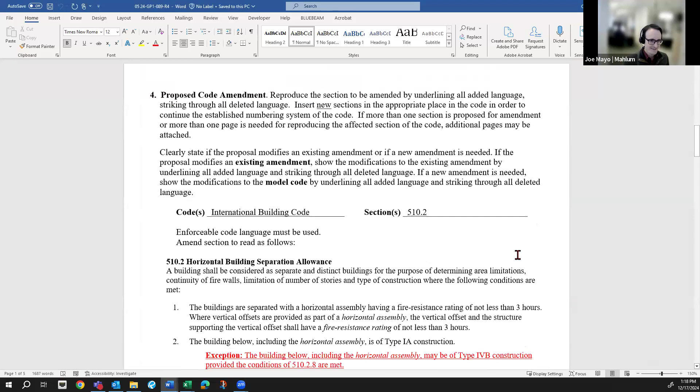Thank you. I can go through a couple changes since the last meeting, and Dustin, if you'd be so kind as to slowly scroll through the proposal. I heard the comments in the last meeting, and we've made updates so that everything new or changed is now underlined. The numbering has been corrected.

One comment from the last meeting was that adding a new section 510.10 created redundancy and potential confusion. So to address that, the proposal is now incorporated back into 510.2 as it originally was, and does not propose to create a new code section 510.10.

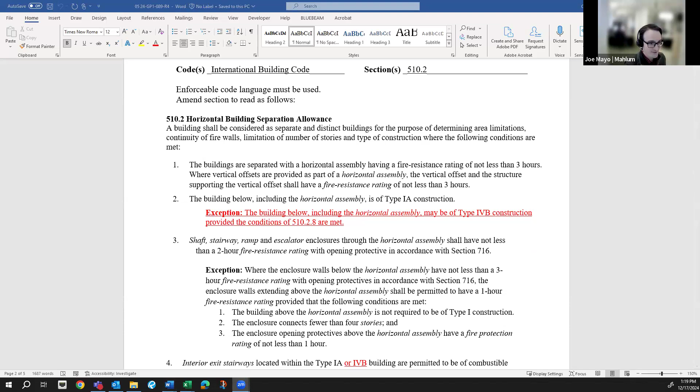In addition to general cleanup, the revised proposal acknowledges Hoyt's comment to specifically address occupied roofs, found in number 8.7. It also addresses Tim's comment about stair pressurization and now requires all stairs to be pressurized regardless of number of stories above the grade plane, in 8.8.

At the last meeting, I shared fire testing from the RISE fire test, specifically for type 4B construction, where the test had fully exposed columns, beams, and ceilings. The tests demonstrated 4B construction's resilience during fire, with rapid extinguishing after flashover without sprinklers or any active intervention. After 2 hours, the fire was essentially extinguished, and tests were carried out for 4 hours without structural compromise.

So the proposal is again looking at 4B construction, and some might ask why type 4A wasn't included. A couple quick words on that: the proposal does require 3-hour fire resistance of all primary structure and load-bearing walls for type 4B construction. Load-bearing walls are not permitted to be exposed in this proposal, so it would essentially be the equivalent of type 4A for any wall construction.

The main reason is type 4A requires 3 layers of gypsum board encapsulation, and doing all that field work of 3 layers makes the systems not cost competitive and creates a lot of additional site work, which is exactly what needs to be eliminated if we're going to deliver housing faster and more efficiently. The additional 3 layers of gypsum board over every timber surface also greatly increases embodied carbon impacts.

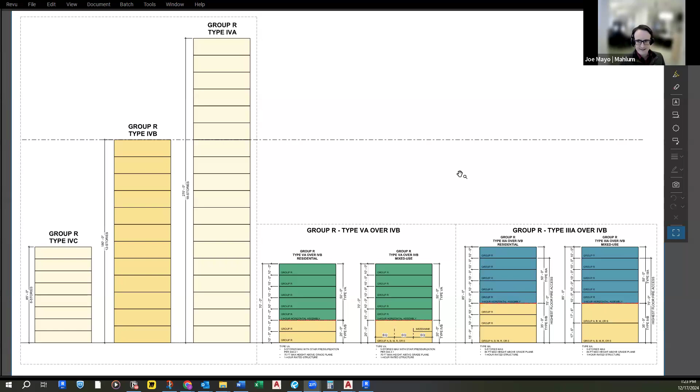And Todd, I don't know if you have anything you wanted to add. Yeah, so thank you, Joe.

In this proposal, if you remember on Thursday, the IBC decided to table this, under the context that we probably were going to finish on Thursday. So there's a little uncertainty on whether or not we could hear this within the package. Bringing it forward today is really the last opportunity to talk about it, and also to get input as requested in one of the meetings from the IFC TAG. So it's up to the TAG what to discuss today and potentially move forward.

But I would say the interest here, when the Tallwood Ad Hoc Committee met in 2015, I believe, the goal, it's called Tallwood, was to go to mid-rise and higher with mass timber. And what often isn't contemplated, in my industry, is more of these higher performance, low-rise typologies.

In this podium proposal, it's not so much to try to be equivalent to 1A. Obviously, it's not non-combustible. The objective is really to find and understand that, in my understanding of the history of going up to the ICC level, only type 4A was proposed as kind of an equivalent to 1A.

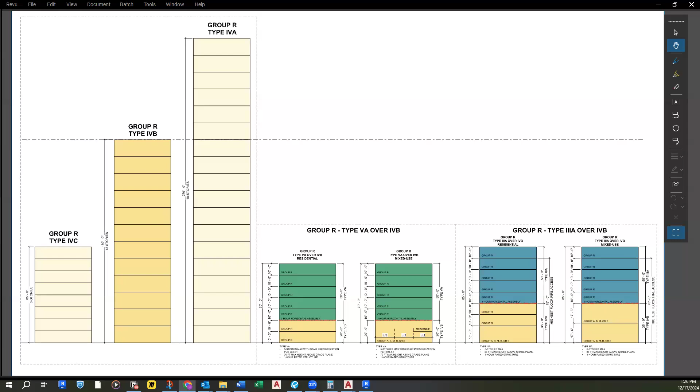Besides some of the reviews, just what the statements have been said so far. So I'm not sure I really support this change yet at this time, because of life safety issues—I believe there's still a life safety issue on this. So that's it.

Okay, thank you, Hoyt. Let's go to Ken. Welcome.

Hi. Not too sure if this was supposed to be a code change proposal to the WAC or to the International Building Code 2024 edition, because 510.2 number 1 and number 2 had changes to it, and you're not showing those changes in the 24 language. So I don't know if you're crossing those out, but I think your code change proposal needs to get fixed to either include the language and keep it, or show that you're deleting it.

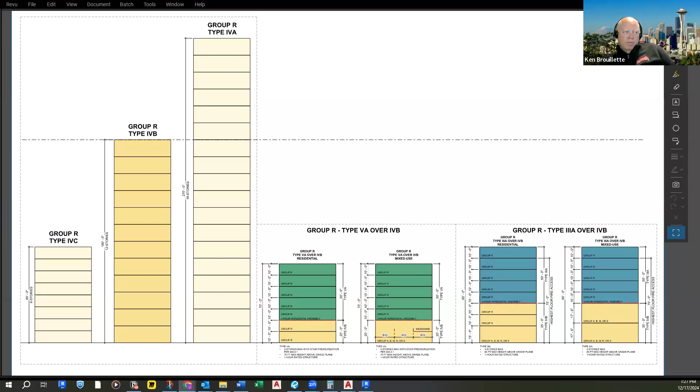And then under number 8—hey Ken, just real quick, Dustin, can you grab the screen back and maybe show us that please? Yeah. Okay, sorry Ken, go ahead.

Well, in addition, I think that the picture that was just up is kind of deceiving, because it says group R occupancy, and the proposal under 8.4 only talks about an R2 occupancy being allowed, or shall be R2 occupancy. So the screen was kind of—I'm thinking, oh, I guess I can have an R1 based on that picture. So I'm just trying to figure out what was the reasoning to only allow an R2 and not an R1 or another R type occupancy, because in the beginning, in number 5, it says the building or buildings above the horizontal structure shall be permitted to have a group A, B, M, R, and S occupancy. How come it's R2 specific for this type of construction?

Thanks. Okay, and that rolls right into John and Micah—maybe you want to address that, go ahead, or whatever. So John. No, I didn't want to try to address it.

Well, I'll put it out there because it was part of the discussion with some of the Seattle contingent, but I won't blame or put that on you, John. So no, it was more of a discussion we had about saying, well, limit it to the type that you're really after—what's the goal here? The goal is housing, so let's limit it to the housing issue and not worry about the other types of Rs. I think that's as I recall the discussion.

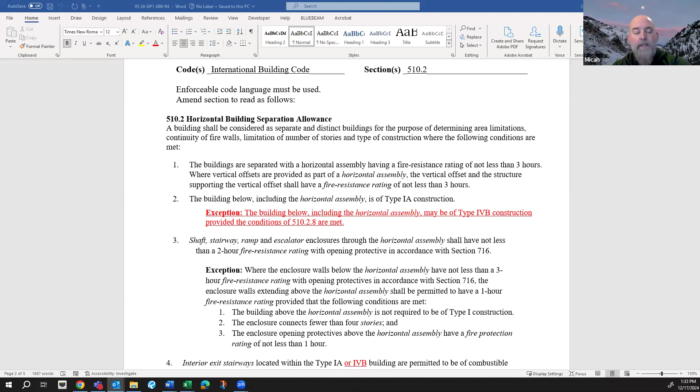One of the big items here is that for the 1A current provisions, they provide for both rating and non-combustible construction, for the benefit of resetting story count, height, and type of construction. The RISE test that you cite in here doesn't account for the equivalent non-combustible construction - it does for the rating. So I'm not sure where you're still getting the justification that we should be allowing the exposed mass timber ceilings with this.

Another part - looking at the proposal itself, the exception to item 2 should probably add that the additional requirements of 510.2.8 are met, not just that the conditions of 510.2.8 are met. There are other conditions in 510.2 already that probably should apply to this no matter what.

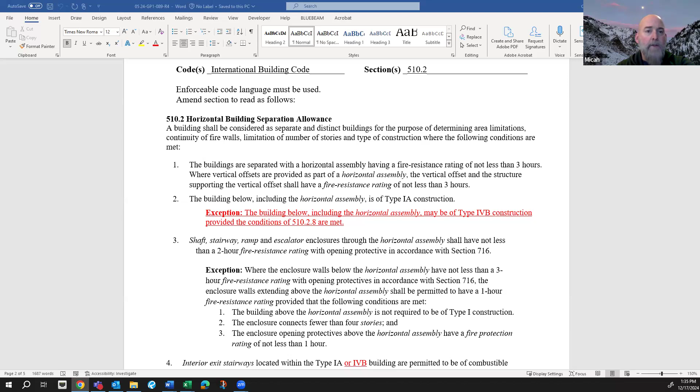Thank you, Micah. And Dustin, maybe you can scroll down a little bit. I think the idea of adding 'additional' in there would be good. Go back up to that first one. If you want, we could actually type it in there.

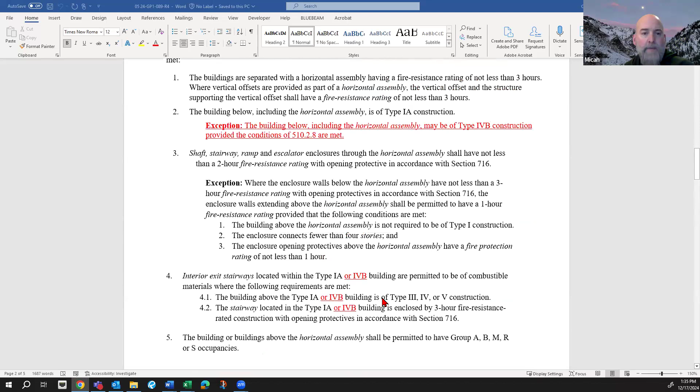Yeah, that was in exception 2, or the exception to 2. Dustin, do the constructions provide the additional conditions? Do you mind adding that?

Did you freeze up, Dustin? I muted myself and did not unmute myself.

Give me a little bit of direction on where that one's going to go in here. Second line of the exception, I think Mike is proposing add the word 'additional' before conditions - additional conditions. Right there.

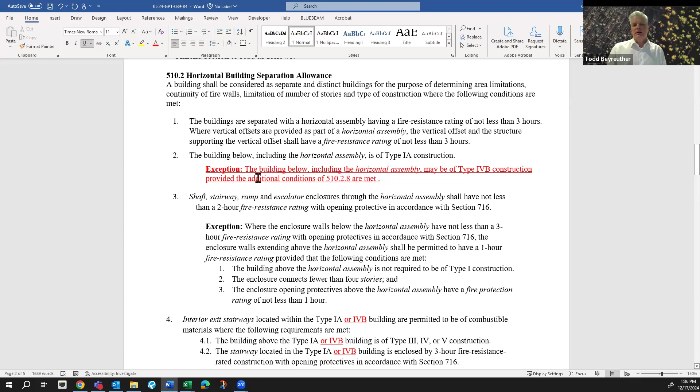And then as we scroll down, I think Hoyt and Micah, I'll respond a little bit to the national level versus the state level. Part of this is not denying that it's always better to have more input, but also Washington and Oregon, I think most of us know, are leading in a lot of these areas.

Not just in the jurisdictional and political realm, but in the technical realm. Our strengths at Washington State University, Oregon State University, our coalition, our technical public-private coalitions that have been around since 2014 - I would argue we are very capable of proposing this type of amendment, and even at the national level, we as states are likely leading in this discussion. So it's not avoidance of that process. As you know, the couple of previous attempts were very simple, straightforward, type 4A.

I'm thinking of Dennis Richardson the last time around. He wasn't representing AWC at the time in that petition, but this kind of discussion has gone forward, and it's always been about that equivalency rather than what are we really trying to achieve here. We're not trying to achieve unlimited area. We're not trying to achieve, obviously, the high-rise building. So is there new learning from not only the fire testing, but also just our technical advancements in the last 5 years since this was last raised?

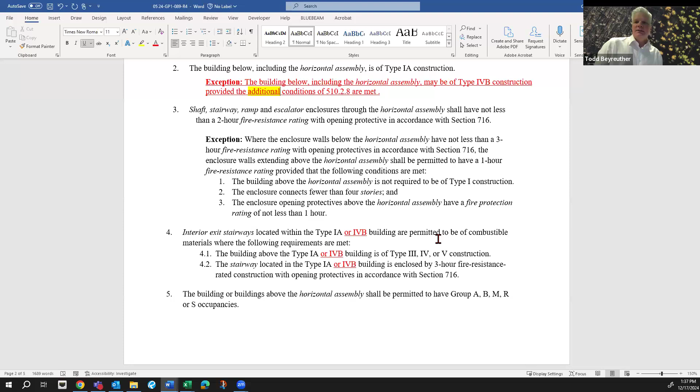So can you scroll down more, Dustin, and then we'll leave it to the group here whether there's more discussion or you want to take any type of action on this. Go ahead, Roger.

Well, I want to just offer my opinions, and Mike, I'm not sure why you and I are offering very alternate opinions so far today, but I will remind people that the state of Washington adopted the type 4 A, B, and C ahead of the international, the ICC. I agree with Todd - we are the leaders in the industry on mass timber. So as far as adopting it before the national, I don't have any concerns whatsoever.

The other thing that I wanted to point out, as far as the commercial demand for this type of product, is you saw on the diagrams that were shown, there are 7 and 8 stories, and I recognize that this is for the Puget Sound area for the most part, maybe Spokane, but densification is a huge issue.

And how we get from a 6-story, 7-story up to an 8-story is always a challenge. So I believe that providing as many possible solutions to an 8-story building as possible to design teams and developers is very important. And certainly when we start talking about cost of housing and how we continue to densify and build more housing at a reasonable cost, throw in the low income or middle income or whatever you want in that grouping, I think that this proposal could be very helpful and provide opportunities.

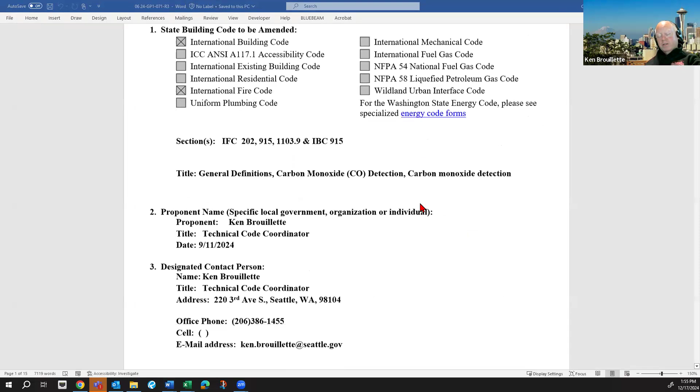All right, 071 coming up. So Todd, while he's bringing that up, let me just give you a recap on what I know on the next proposal. On the 12th, the IBC tag at the 2 hour, 6 minute, 50 second mark approved the petition. The next day on the 13th, the BFRW approved the petition revision 2 to go to full council.

And back on the 12th, you'd made a comment, and I agreed to it, that I would work on any of the changes for the public comment period meeting and try to clean anything up that was addressed by the building code tag. I had no idea this was going to be happening today.

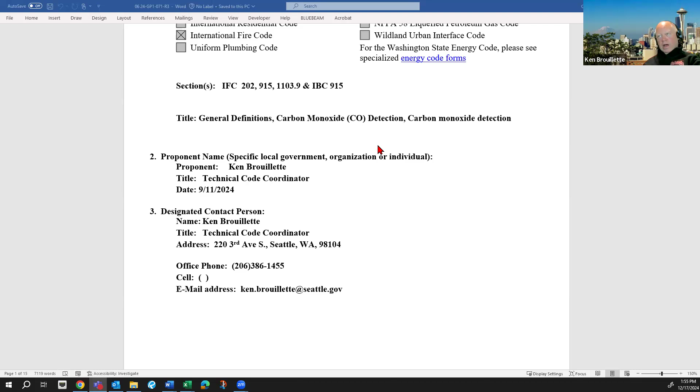I saw the fire code tag meeting canceled yesterday. I saw the email that said there's a joint meeting today, and then I pull up the agenda and it says it's the IBC tag meeting. So I was thoroughly confused on what's going on. I didn't know that we were going to try to make changes now. I was under the impression that everybody agreed that I was going to try to tweak it at the public comments, but it's already gone through by the tag once, and now it's back at the tag again.

So I'm just lost. Ken, I think your comments are accurate, but can you help us better understand the IFC proposal went through, and what does that mean? If I understood your comments at the IBC, that this proposal was different and not correlated, but help us understand that, please.

Well, my understanding is the IBC at 2:06 and 50 seconds said you were okay with that proposal that was changed, that got rid of the word existing. The revision 2 that got sent or approved by the BFRW did not have that change. So again, I think, wasn't that the IFC proposal? I thought we tabled the IBC. No, proposal, it was voted 2:06 and 50 seconds.

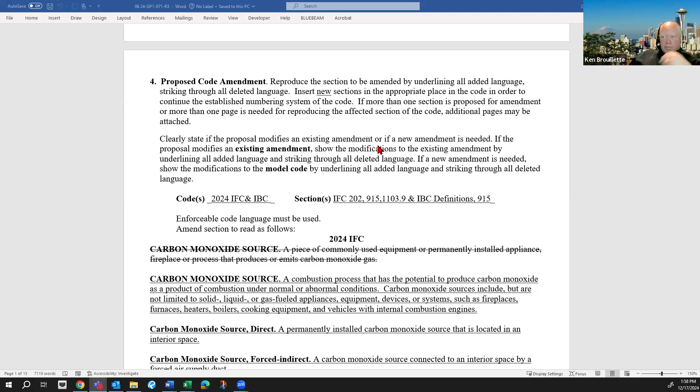So now you're confusing me, Ken, but I think you're raising a point here. So let's unpack this. Hoyt, go first, please. I think Mike was up first, so I might as well just go in order. Okay, that's fine.

Michael, go ahead. I don't know. I think Hoyt was, but I was just going to comment that my scribbled notes are consistent with what Ken is saying here. I'm showing that last week we approved as modified to move it to the full hearing. So I don't have... so we could go on a correlation at the council level.

Yeah, that might be true, Mike. And if so, I apologize. I, for some reason, remember we tabled it thinking we were going to finish on Thursday, and therefore that this was going to move forward to, as we're going to table it to bring into correlation. But go ahead, Dustin.

You probably can tell us. I think that's true. We did table it, but then we jumped back into it, and then ultimately had more conversation, and then the approve as modified. If my notes are correct.

So go ahead, Dustin. On this particular one, looking back at my notes for the last IBC only tag meeting, I have it as a recommend adopt as amended at that meeting for revision number 3. When we heard it at the BFRW committee, we brought that one forward. It was discussed to have it worked on among the public comment period. I think this speaks to some of the concern that Micah brings up about correlation happening sooner than later.

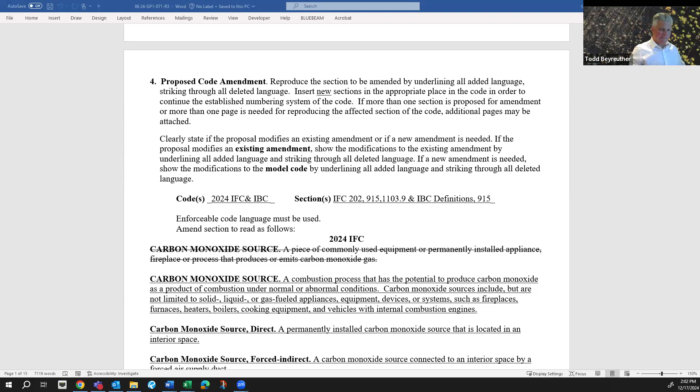Okay, thank you, Dustin. Tim. Tim, you're muted if you're talking. Sorry, I'm sure you called on me. I had legal step into my office.

So I was just going to comment that maybe the most productive thing, if we're going to discuss this, is to pull up the changes to the IFC's proposal just to see if they agree to it. But I'm totally comfortable, but the one that's on the screen doesn't even show anything new, so IFC wouldn't know what those changes were.

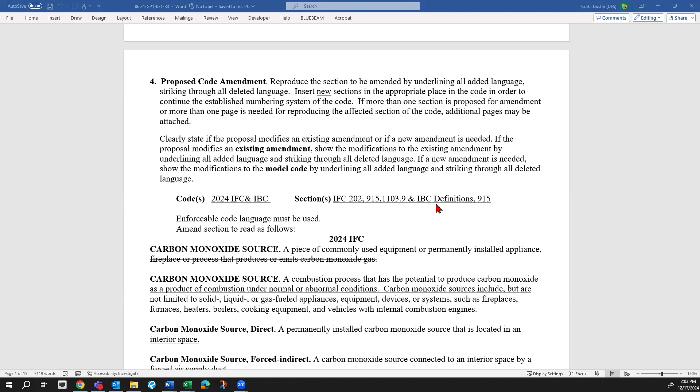Go ahead, Roger. I agree with Tim. I think we're here, and I seem to remember after Dustin reminded me that was what we were talking about is, all right, IBC approved it. I thought we made a couple of minor changes, but because we were getting the IFC tag, let's at least let them know what those changes were. I'm also fine if we just at this point, that if the IBC passes something that's a little bit different than IFC, then that is the correlation that has to happen either probably during the public comment period.

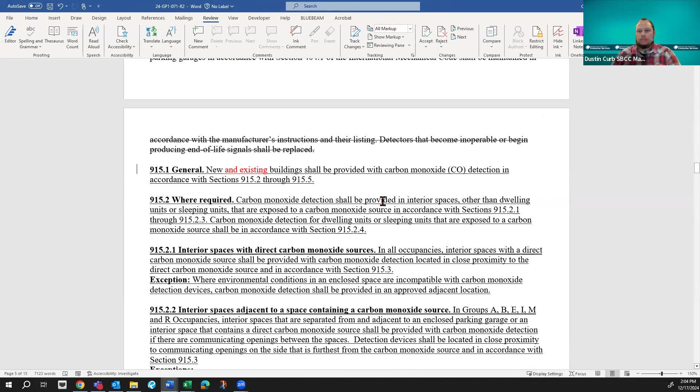So this here, I believe, is the change, the 'or existing.' Anything else that's changed should be highlighted in red in this document. Yeah, I just want to tell you, Dustin, now I remember, once you showed that it refreshed my memory. That's what we wanted to make sure was put in for existing buildings also, carbon monoxide detection system.

Okay, Micah? That wasn't the only change that I had concerns with, and I think that's where it ended up needing work. That was related to the power source.

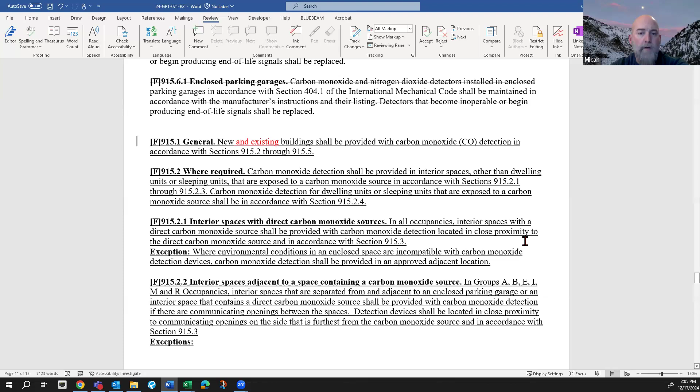It's striking the IBC language, or the IFC language in chapter 11, that allows for battery operated detectors, and moving the power source information into 915.4.1.1, where it no longer allows for battery connected carbon monoxide detectors in existing structures. They're required to be wired. That's where there's this discrepancy, I think, that Ken talked about coming back in public comment, furthering this issue.

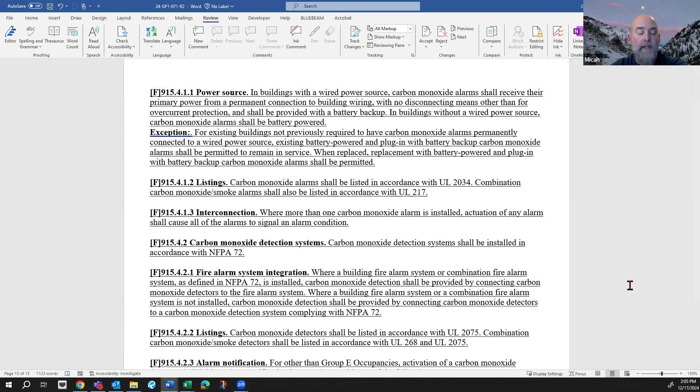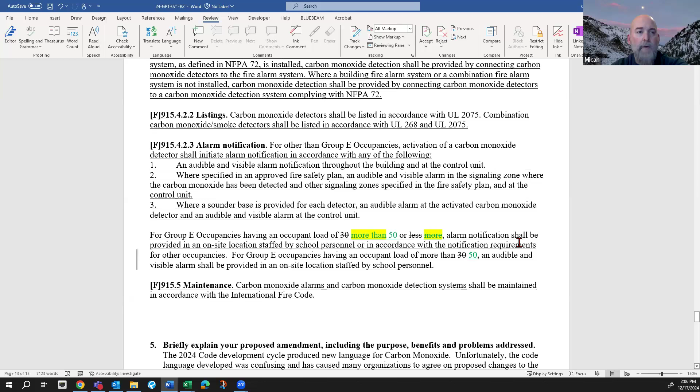If we want to address it today, then we need to look at the 915.4.1 language and the strike-through of chapter 11 language further down in the proposal from the IFC that removes any allowance for battery operated carbon monoxide detectors in existing buildings where they were not previously installed. The new requirement is a retroactive code change that allows or requires hard wiring of carbon monoxide detectors. Thanks.

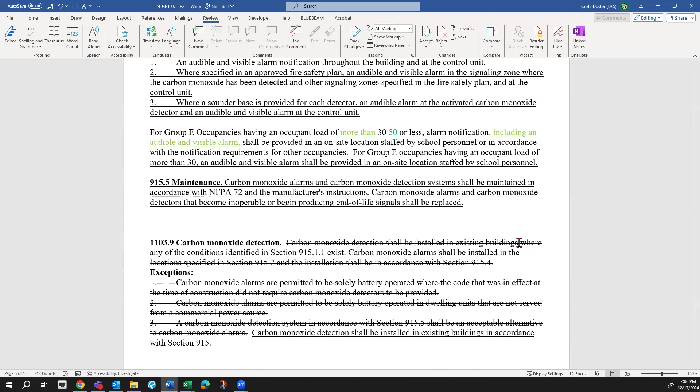Okay, Tim? The only other change that I recall us making was to the definition of carbon monoxide. There was something like normal and abnormal conditions. We just said any production of carbon monoxide, something to that effect.

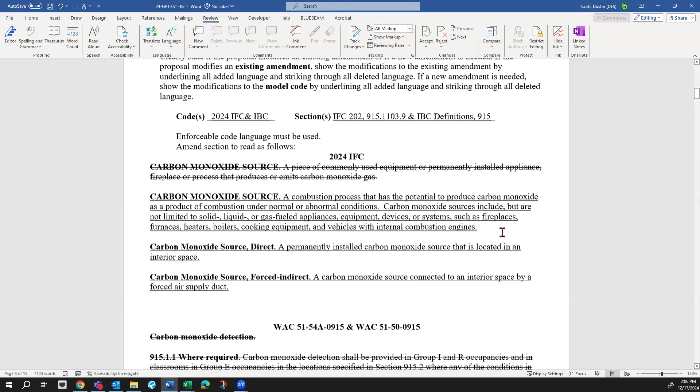In the document I have here today, it's got revision 3 being compared to it. I did not make the change. I know we talked about it, but I don't think we modified that in this proposal. But I guess that's why we're here as the two groups, to correlate these changes.

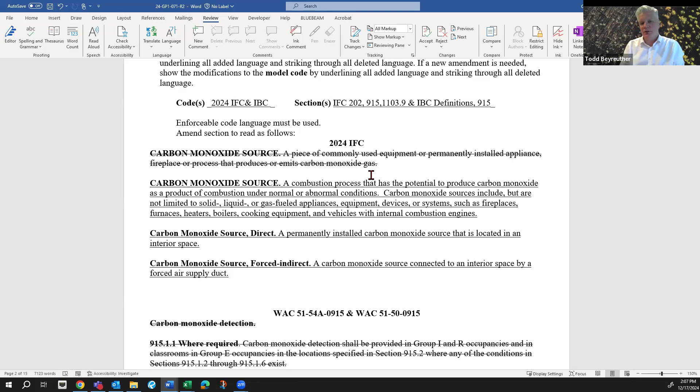Okay. So Ken, as a proponent here, what do you suggest? Do you want to talk more about this in this joint meeting? Well, I think your previous request was to take time and do it. It's just tough to see your proposal not showing the changes that were done at the tag level, because now it just looks like everything that's there just came from me. So it's like it doesn't show that 'or existing' gets removed. I don't know, and this is the reason I thought I had more time to work on it.

I wanted to look at 1103.9 and see if it should just go back and not get struck, and just make sure the references are okay to take care of the existing, that would take care of what Micah's concerns were with the battery. I just didn't do the deep dive yet because I really thought I was going to be doing this at public comment. And Dustin, I love you to death, but the agenda only says IBC at the top of it.

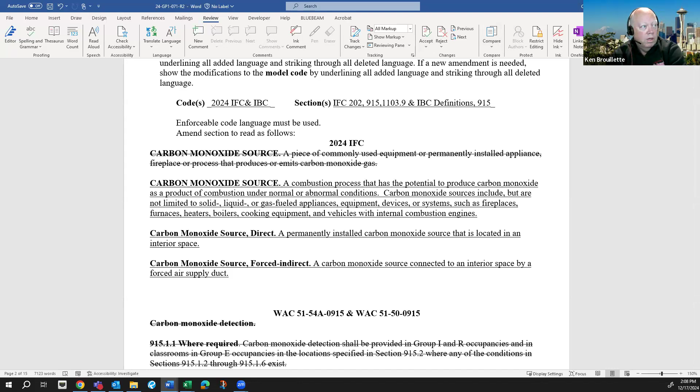If you wanted to scroll up and look at the agenda, it doesn't show both. When I click on agenda, it doesn't show both. It only says International Building Code Technical Advisory Group and all interested parties. So that's why I was so confused.

Thinking that this was going to be an issue, I just thought that it was accidentally put on the agenda, since this committee already approved revision 3 that removed the existing. And when it didn't go on the fire code, and there was no fire code tag yesterday, I thought, okay, well, they're not going to talk about revision 3. So I'm just not prepared.

I would rather just try to take care of it at public comment, and see if I can explain anything, and then let the council turn it down if they want to turn it down then. But yeah, I just wasn't ready. I think there's some things that I can do to it, but if the two committees want to work through it and make suggestions, that's great. And then I'll make my public comment suggestions at public comment.

What do we need for that to happen? Would that be appropriate for me to make a motion, Dustin, that we just move this forward to CR 102? Yes. Or have we already? You already did. So I don't think there's any issue. But putting in a public comment, since we've already approved it, I think putting in your public comment to make the changes to make it better will probably get approved too, in my experience.

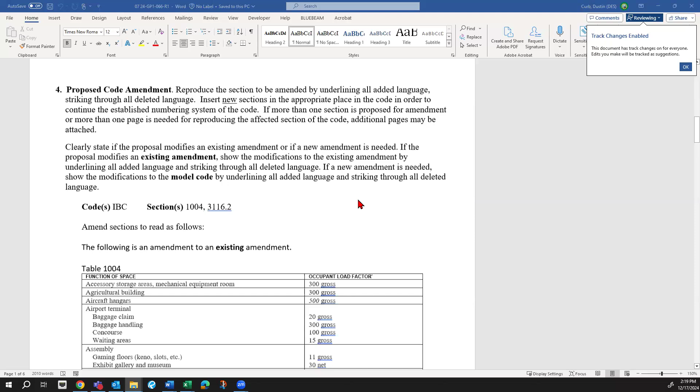Go ahead, Mark, are you trying to speak? Yes, I'm here. I think it's fair, Ken's point, that we need to address it in the fire code as well. I wasn't so clear on the process. Given that these are building code issues, I think that we forgot that they're repeated in the fire code, so we didn't make a proposal on the fire code. I did make a change based on the feedback from Thursday. However, you want to scroll down to the separation section, there was some question about it, it's down further, right there. Yeah, so the 5242 and 5245. Previously, actually, this is not Rev 2, this is Rev 1. So let me bring up the other one that we have. Yeah, thank you, appreciate that.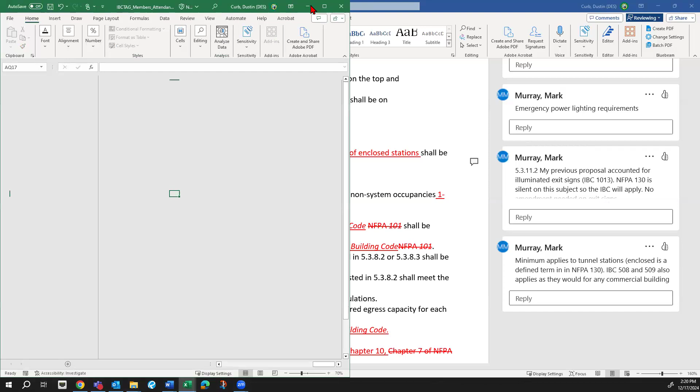So this would exceed the building code requirement if someone were to go down a pathway and find a solution using non-separated occupancies. For example, they would still need to provide at least a 1 hour separation between the back of house areas and the public areas in an enclosed station. And so this addresses exactly what I was trying to do before.

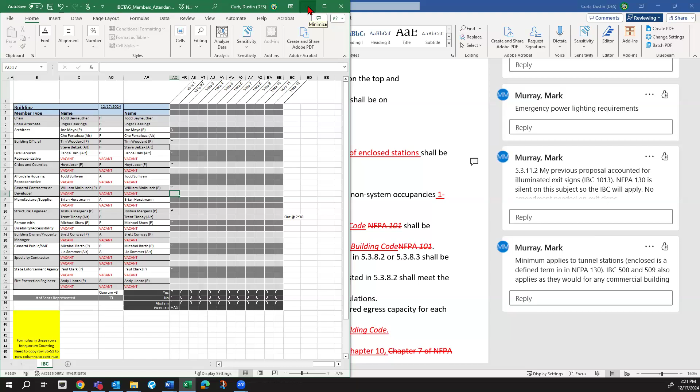This is Sound Transit's practice to do it this way, and my point is to try to just get this in the code so it's really easy for plans examiners to see and understand. Enclosed stations, as I mentioned before, is a defined term used in the code, and it captures tunnel stations and other stations that are largely enclosed such that smoke and hot gas would not easily move out of the station through natural ventilation.

So those are the changes. I didn't change anything else. I believe this may have been the only issue remaining. The only other thing in here from the original proposal was at the bottom, to actually reflect that we want to change Chapter 35 to note that we're adopting the 2023 code.

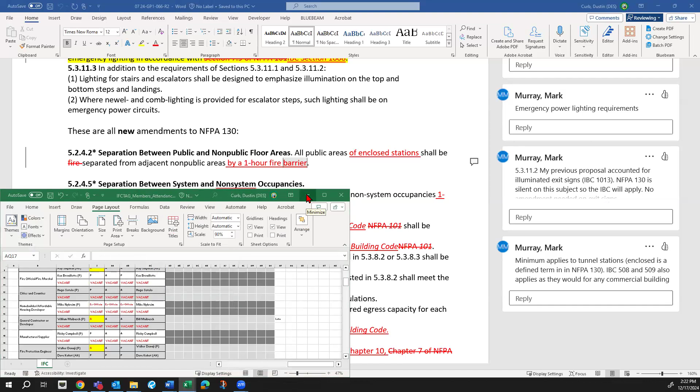Yeah, there was. Yeah, if you can just scroll down a little bit more, you'll see that the only other section that I changed from the previous is right there. So I just added that to make note that we are adopting the 2023 version as part of the building code, and put the standard language in there about where provisions exist in the building code. So that's just housekeeping. That's it.

Okay, go ahead Roger. Thank you, Mark. Yeah, it seems to me like it's obvious that this does need work, and certainly if we're finding out at this stage of the game that we should have looked in the fire code previously.

I believe there is one issue that we are going to send on to the council, knowing that that's an outstanding issue. Dustin, correct me, I don't remember what it was exactly. But we've identified one proposal that we know will be lagging behind, and we need to continue to look at. Do you remember which one that was? I believe that was going to be the 089 one that we denied earlier today.

Okay, well, I think we just flagged this knowing we approve the whole rest of the package. And in my mind, if we have to have the council take special action to say we understand this particular proposal didn't go through the proper review, so it needs to be done, and we break that out, we do that, and we address it both at the IBC and fire tags after the rest of the phase group 1 proposals are approved by council.

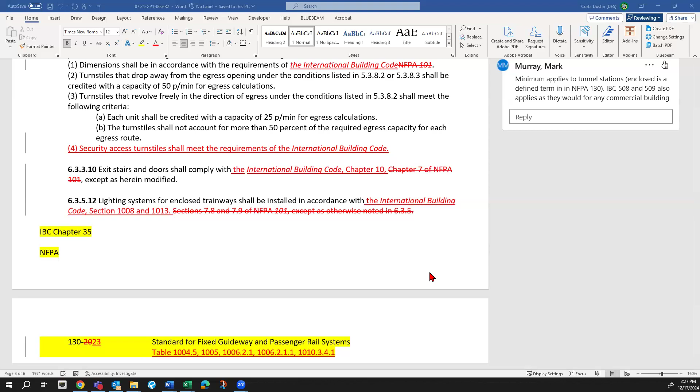I guess I just wanted to step in based on the new revisions. I have no idea where we're at with everything, but I do appreciate the changes that were made, and I think that was kind of what we were trying to communicate before, why we were specifying those separations when that was already a requirement. So I think the changes made in this latest revision satisfy my concerns about why we were making those changes to begin with.

And since those are the only issues I had left outstanding, I think what we have here is the proposal, although it needs to be correlated, although it needs to go into 35 of the IBC - I don't know how any of that stuff happens. I just wanted to speak to the actual changes and say that I can be in support of what this latest modification shows.

Okay, thank you, Tim. And I agree with Tim. Okay, thank you. Wait, go ahead, Walker.

So yeah, Dustin, I did run with it for the fire tag. So would this be a correlation process? Just seeing them for the first time today, I think Mark's proposed changes make sense, but would that be Mark and I correlating to pick up corresponding changes in the fire code?

That could be the preliminary part of that, yes. The last note on our existing amendments report is that we need to correlate with IBC Section 3116. So if that could happen there, that would be nice. Then, as we get to the correlation part of this, most of the changes to update NFPA 130 were considered editorial.

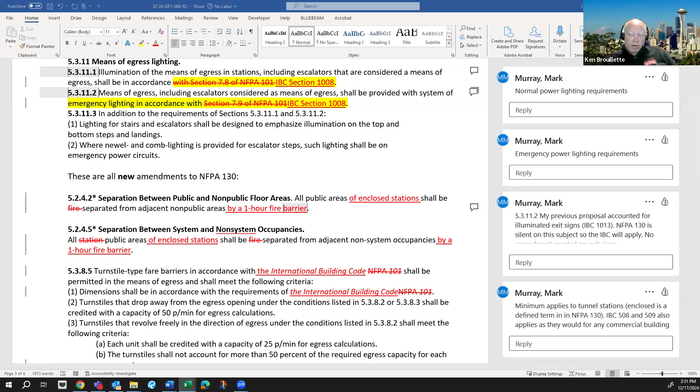It doesn't show up on this, but that is an existing state amendment where the language has been changed in NFPA 130. So I'm just wondering, for the IBC tag, what did they say about their existing amendments to NFPA 130? I'm popping it open right now, so give me one second.

This isn't one of the ones that I downloaded to my desktop today, so it takes a little bit of a second to pop it open. Should be opening up in a second.

All right, so for 51-50-3116 modifications to NFPA 130, we have keep the existing amendment as modified. Oop, and I moved beyond it. I have my cursor somewhere else. Give me one second to get back to the spot.

Dustin, I don't think we're seeing it. You're trying? Oh, I wasn't sharing it. Here, I'll pull it up for everybody to see what I'm looking at.

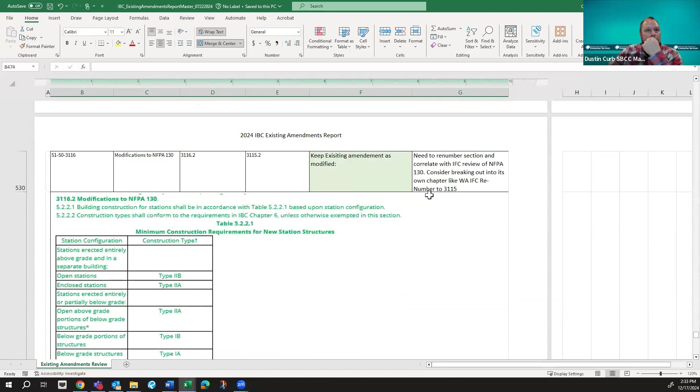I passed it. This is it right here, this big long section. So we need to renumber the section and correlate with the IFC review of NFPA 130. Considered breaking it out into its own chapter like the Washington IFC, and it needs to be renumbered to 3115 as the overall motion here. So it looks like the modifications here were just to talk about the changes made for the update to NFPA 130.

So I guess my example is scroll down to 5.2.4.3. And that word at the end of the sentence there between the ASTM and the ANSI UL standard, that 'and' is now an 'or.' If you consider that editorial, that seems like a significant change. But the 2023 version of NFPA 130 — this is just one example — says the word 'or' now. And there are other changes.

So I really think it looks like the IBC tag thought about renumbering it, making it different, correlating to make sure that all NFPA 130 standards in WAC 51-50 and 51-54 are similar. But if that's not what the tags wanted to do, that's fine. I'm just trying to listen to see what each tag wanted to do. But it kind of sounds like what Dustin just said, that they said make it its own chapter. I think it's just one of those chapters where everything just got missed. Everybody was working so hard to get so many things done that we didn't give this NFPA 130 document a good enough look. We really need to do that, just make sure we don't miss anything.

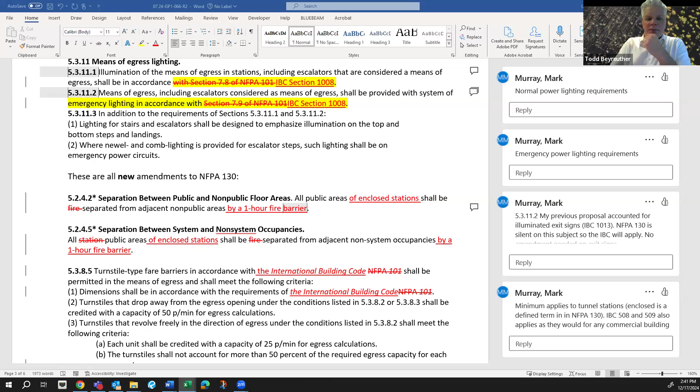Okay, thank you very much for all that. Is there any other business that I'm not remembering between the IEBC and the IFC before we move on to IBC specific tasks?

Okay, if not, thank you for the IFC. You're welcome to stick around, obviously, but we're moving into EV charging stations that are specific to the IBC.

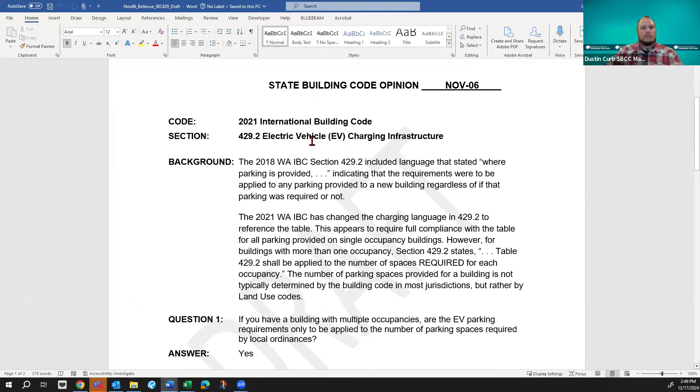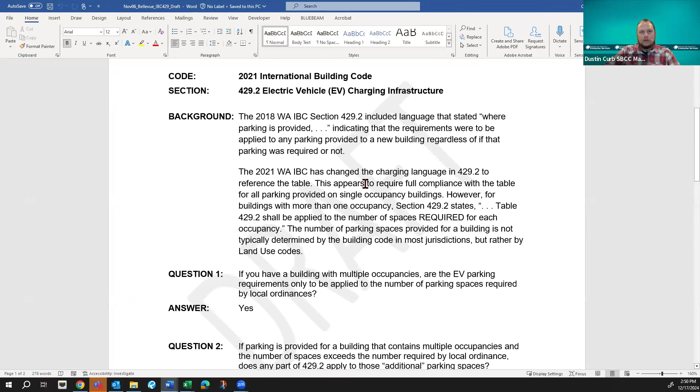Okay, thank you. So here is November 06. These are the same ones that were, I believe, posted for the BFRW here. In the 2018 429.2 of the International Building Code, the language was 'where parking is provided.' In 2021, that language just references the table. Their question is if you have a building with multiple occupancies, are the EV parking requirements only to be applied to the number of parking spaces required by local ordinances? And my draft answer was yes.

And I'm trying to get in here to some other stuff I have on from the BFRW. I think we did make some modifications at that meeting, and I want to kind of bring them up for discussion purposes, and we can move forward because the answers were changing as we drafted these. If we want to talk about question one while I pull this up, I guess it's appropriate.

Okay. As everyone skimmed this, do you kind of get the context here? So the discussion is about what is - obviously the building code does not require parking, a number of parking spaces. So does local ordinance control, and then when it goes to mixed occupancy, I'll let you read it here.

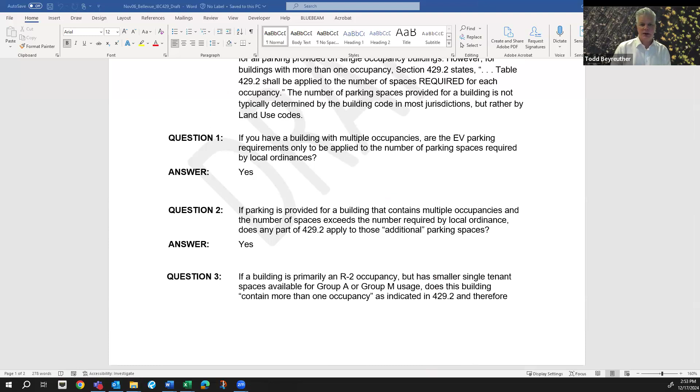Okay, that's helpful Tim, thank you. And did you get question three? Did you see that? It's a little hard as it jumps to the next page here, but I think there we go. Yeah.

Dustin, do you have - I thought we edited those at the BFRW meeting. We did, and at this moment I'm struggling to find them. There may have been an issue with the battery on my computer, and they may be in a recovery folder somewhere, I'll have to dig them up. I know our biggest struggle was, is it based on what's provided or what's required? At our committee meeting it was not clear, particularly because on the required side Todd brought up that City of Spokane's requirement is 0. So we kind of felt like we were heading toward it should be provided, but felt it needed to go back to this group for clarity.

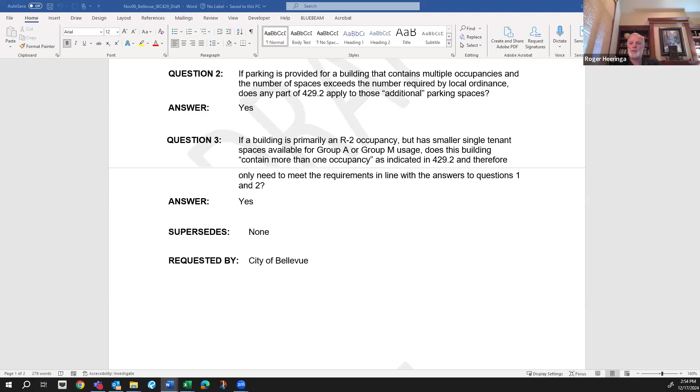Okay Micah? I agree with Roger, I think it did come down to part of that. I believe I brought up where the code language is not completely accurate with the RCW, and I think that's where we decided to leave it - the RCW requires that all provided parking be provided with the EV infrastructure. That was kind of the discussion. I'm still not sure if I agree with the answer to question 3, where it says we would only need to meet the requirements in line with answers to questions 1 and 2. I don't believe that's the intent of the legislation, or the requirement of the RCW, which would take precedence over the rule. Thanks.

Okay. So Dustin, we as a tag don't take formal action on this, right? We don't need to, it's really to give feedback. Correct, okay. So I guess I'll ask, is there any other feedback you think the BFRW committee should consider on Friday? Please chime in if you think of any. Yeah, just want to say I'm with Micah, I think question 3 might not be correct.

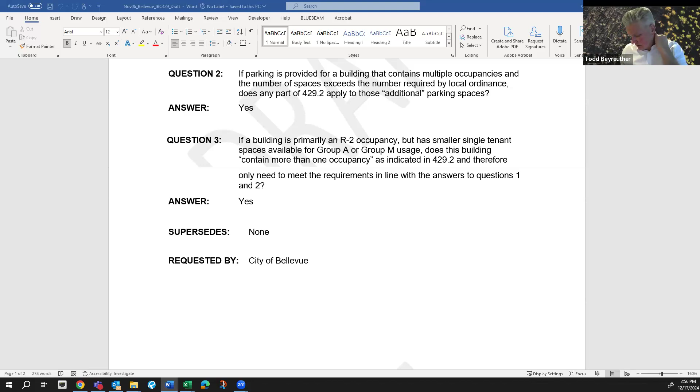Okay, Micah. Thanks. If you want to talk about editing or modifying the draft today, we probably should start with question 1 and determine if that is accurate. If you want input, I'd say the answer is accurate based on the language of 429.2. However, I believe the answer is not accurate based on the RCW. Again, it's the whole required or provided issue - RCW says provided. I'd say it would be a yes to the required, but we'd have to put the caveat that it's yes to all that are provided, regardless of local ordinance. That's kind of where we landed on Friday, if I remember.

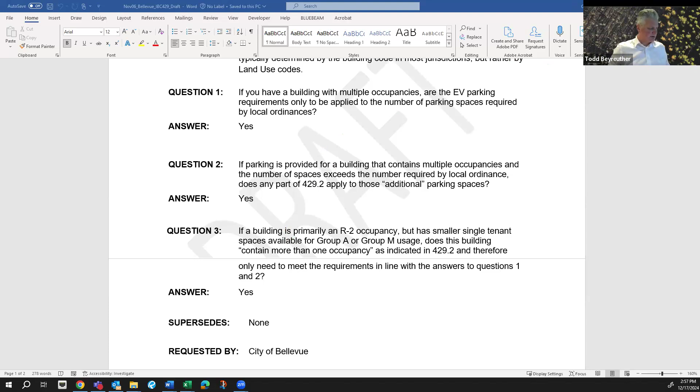It sounds like it goes back to that required or provided concept again. It sounds like the RCW says provided, so that would apply to all provided, including fleet vehicles. But possibly 429 says required, which probably wouldn't apply to any fleet vehicles.

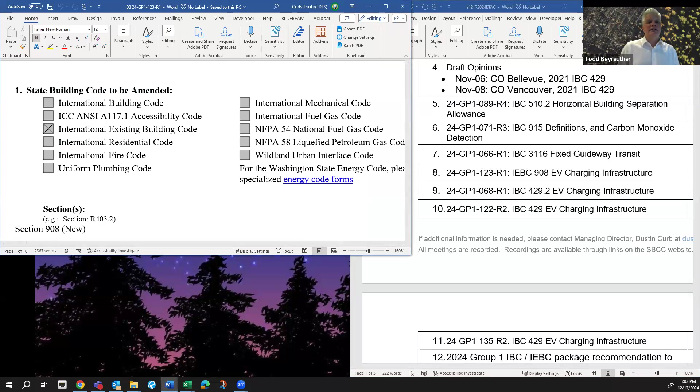Yes, I think you were right, and we were towards the end of a meeting and knew we were going to have to come back and look at the other three. So yeah, we did discuss it, didn't necessarily come to a conclusion. Okay, because it's on the schedule, let's take a look at it, decide if that's still our action here, and we want to move into the 3 table changes.

So, if the proponents are here, feel free to raise your hand if you have anything to add. As a reminder here, this was then pointing to section 429, which we're going to look at in the other 3 proposals.

Go ahead, Tim. I thought it was more of a courtesy thing that we're going to allow them to try to modify it to capture things such as substantial improvements and other provisions that may have unintended consequences by adopting this. So I thought there was going to be some changes presented in regards to it. You might be right, Tim.

Kathleen's here to help us. Welcome. Hi, everybody. Thank you very much. Kathleen Petrie, King County. We did send a revised proposal to Dustin on the 8th of December. Okay, that shows a modification in the section number, because I believe it needs to be 909, and there is an exception, as well as additional argument added.

Okay. I'm sorry, can you say that one more time, please? So that's my bad not getting this up there for this one. And I believe this was pointed out last week as well that I didn't have it updated here.

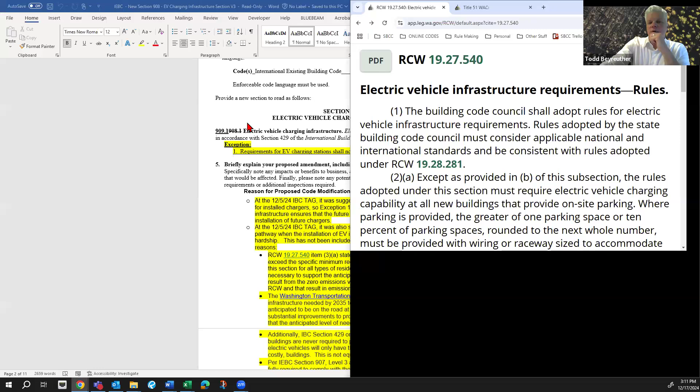So we're still talking about the existing building, but there's no reason we can't reference the other ones if you have comments around there, and then we do have to talk about striking that exception at some point on that third proposal. But I'll move on to Tim here.

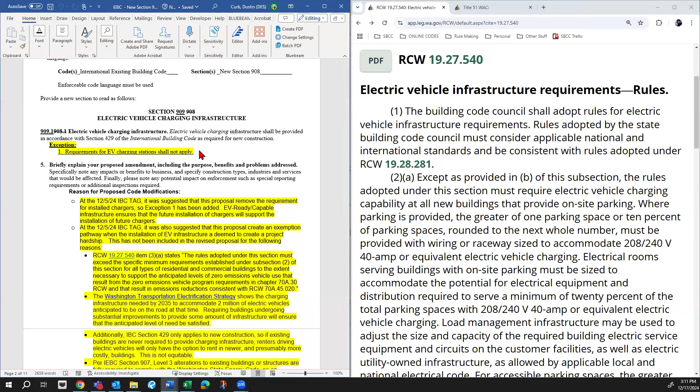Just sticking with the existing building section, I believe that the RCW that's up on the screen is pretty clear about new construction, and I do understand that 3A says to exceed, so maybe you could extrapolate that into existing buildings. But I don't think that we should be using this as rationale to not properly vet through the different ramifications this change would have.

When I look at and heard different arguments about areas that maybe don't have the power infrastructure to support it, and can't get the power infrastructure to support it, we're just crossing a line of, no matter what the cost is, you're going to do this improvement. And I don't think we're there yet. I don't think that was the intent of the legislation, and I think that's why it was very specific to new construction.

So for that reason, for there being no other exemptions for exceeding 50% of the value or anything else, I think sometimes we mischaracterize a level 3 tenant improvement as this massive remodel when all it means is your work area exceeds 50% of the area of the building, and that doesn't always translate to a massive, very expensive remodel. So I'm still not in favor of this, and for those reasons, I don't think I'd be willing to move this forward. Thanks.

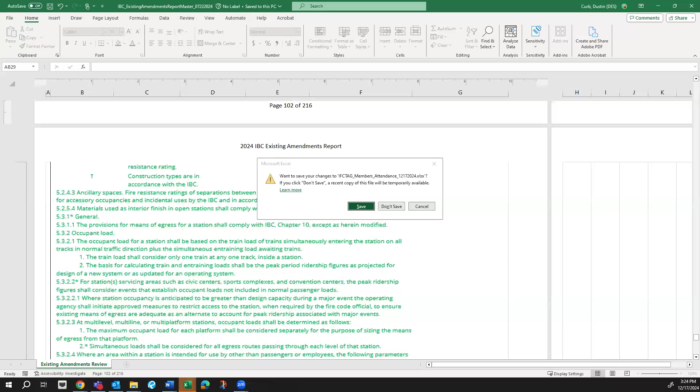Okay, so let's move into a roll call then, please. All right. All right, Joe Mayo.

Aye. Tim Woodard. Aye. Lance Dahl. Aye. Hoyt Jeter. Nay. Bill Malbusch. Aye. Josh Mergens. Aye. Michael Shaw. Aye. Michael Barth. Aye. Paul Clark. Aye.

The motion to deny passes 8 to 1. I guess I should, on those denial votes, ask if anyone wants to change their vote and make sure they understood aye was for denial and nay was against denial. But if hearing none, okay, thank you for that. Thank you, Kathleen, for bringing that forward.

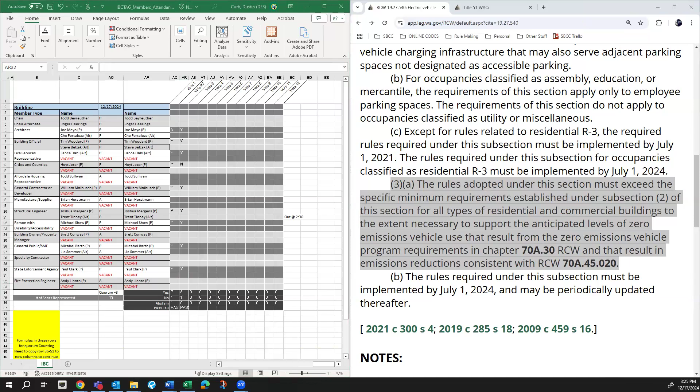Okay, now we're moving into the three, one proposal, EV proposals. The first one, do we want to address first probably petition 135, which had the legal question? Yeah, I think that would be relevant to this one to kind of talk about a little bit first. Okay, unless anyone's opposed to jumping out of order like that.

So the question asked was about the exceptions, whether or not striking them and modifying exception 1 and completely striking exception 2 would be contrary to the requirements of RCW 19.27.540. In discussion with our legal representation and interpretation of that RCW, the modification as proposed would make us non-compliant with that RCW in that legal opinion. So if we were to move this particular proposal forward, we'd have to remove the modifications as drafted for the exceptions here.

Okay, so just framing all of this, we've talked about this a lot. We have time and we'll make time to continue discussion and deliberation and questions. We're scheduled to go to 4 today. We can extend that if it's the will of the TAG, but we do need to take action on agenda item 12, which is moving the full package. So just kind of framing our time here.

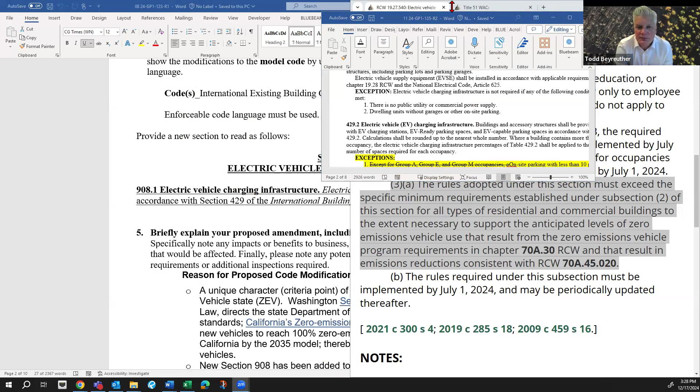Do you want to put the other ones up? So just remind everybody the reason why we're grouping these all together is that if it's the will of the TAG to pull that exception out, really we're talking about table changes in all of them. Yeah, so I don't know what would be the best way to show all of these. Just maybe start with number 8, and Tim, go ahead and talk while we're doing this.

Some remind everybody, 123 first. Well, essentially, 123 was IEBC, was it not? Oh, I'm sorry, you're right. 068. Gotcha. So here's 068. The main change here is to change the number of EV ready parking spaces for all other group occupancies from 25% to 15%. And is that an accurate characterization, Patrick?

Yes, I was just going to clarify if we're just talking about the exception for that one proposal, or if we're talking about all 3 of these at the same time. I believe now we're talking about all 3 of them. In the exception, if we move all 3 together, that exception needs to be modified so that it's accurate, or remains the same as it is currently drafted.

Go ahead, Tim. I think you're right. And then we'll go back to you, Patrick.

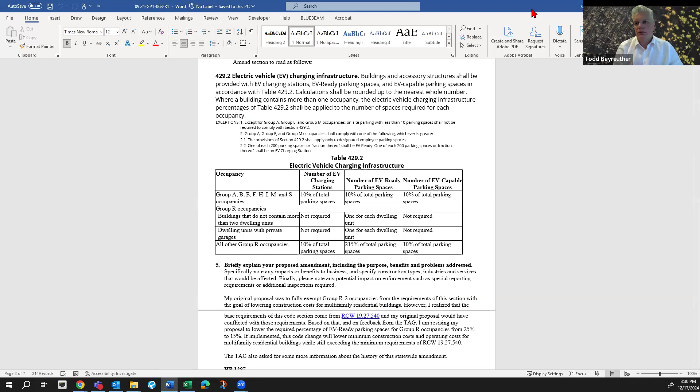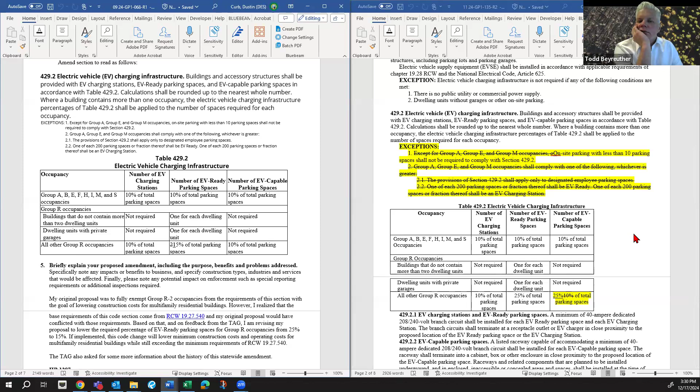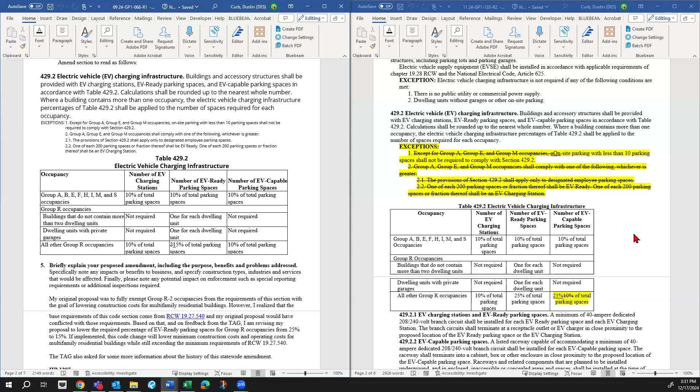So I was thinking we maybe could take action on the first one we were looking at, because the only change besides that is the EV capable parking spaces, which could easily be captured through public comment or what other provision if the other code changes go through. So my anticipation of how we could move forward today would be to deny that first proposal and focus our conversation on these other 2 proposals and how to handle them. So was that just to clarify what you were saying, Tim? You were suggesting we potentially make a motion to deny petition 135, which is this one here. I'll show them side by side with 068, and just the one that's on the right hand side of your screen. You're suggesting the TAG entertain denying that particular one, and then talking about the other 2, which have modifications to the same section? That's correct. And Tim, the alternative would be to amend, right? But either way, sure, but you could amend the other one if we wanted to amend to include now 25% there, or that could be captured at the SBCC. It just didn't seem like there's any purpose in continuing on with the second code change or the one on the right-hand side of the screen. Yeah, understood. Okay, let's hear from more people than Patrick on.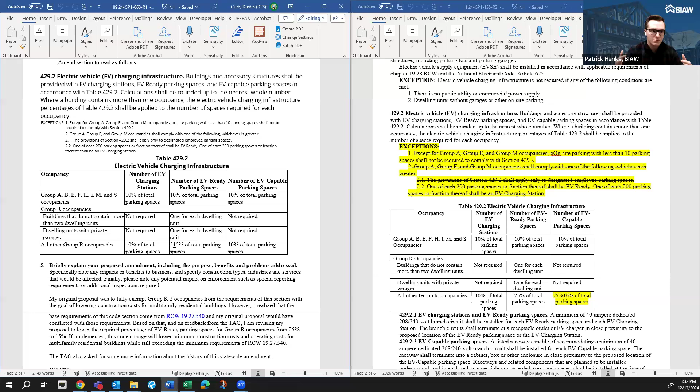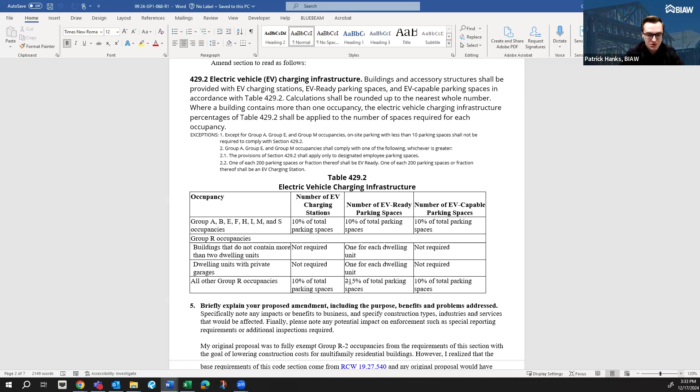Yes, thank you. There's been a lot of discussion about these proposals so far, so I'll try to keep this brief. I think that the current code already massively exceeds what the RCW is asking for. And based on the feedback that I've heard from folks involved in the construction of these types of buildings, they said the current code is just really excessive. So I tried to look for a way that we could walk that back a little bit, but still meet the goals of providing EV charging parking to meet the needs of the occupants, not just for now, but 50 years from now, while also lowering the construction cost a little bit. And I think that my proposal does that. And I think that's in line with also one of the statutory objectives and purposes of the State Building Code Council, which is to eliminate restrictive, obsolete, conflicting, duplicating, and unnecessary regulations and requirements which could unnecessarily increase construction costs or retard the use of new materials and methods of installation or provide unwarranted preferential treatment to types or classes of materials or products or methods of construction. That's from RCW 19.27.020 subsection 4. And so I think with my proposal, we're still exceeding the requirements of the law, and based off that Excel calculator I showed to you before, this will still be providing an ample amount of EV charging infrastructure parking spaces that will meet the minimum needs of the average occupants of buildings, even when we get to near 100% EV adoption. So I can understand how there might be some desire to maybe move forward both of the proposals that affect EV ready. But in my mind, really, I think the best thing is to just look at either reducing it or keeping it where it's at, which would be my proposal. Either the council either adopting it or not adopting it, and I think there's plenty of room to reduce that just a little bit, and it's going to lower construction costs a little bit, but still provide a lot of EV charging infrastructure that will meet the needs of the occupants in the building 50 years from now. Thank you.

Yeah, thanks. So I'm going to preface this by saying, since the fire tag is over with, that I'm speaking on behalf of myself as a citizen and resident of Washington. Speaking from personal experience, I recently bought a brand new condo, new construction. Luckily, I was able to get an EV spot, but I was also on the board, and there was a high demand for EV spaces. There was 5 available spots left in the infrastructure, but we had 20 people asking for it. So there is demand for new construction. Also, if you guys follow the subreddit for Washington, there's a lot of folks on there that are constantly complaining about the lack of EVs for their apartments, their condos. So, if this was a negotiation table, I would probably be willing to combine both proposals together, give Patrick the 15%, but also get the 25% of EV capable. Because then that would satisfy folks like in my building, we have those 20 people, but we're short 15 EV capable spots. So, at that point, if they want it, they could pay for it themselves, but at least it's capable of having it. So that's my 2 cents on it as a resident.

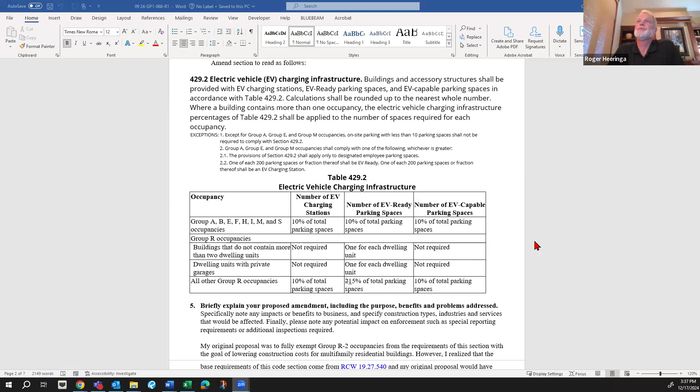I don't agree with reducing it to 15. The rationale they're giving is about cost difference, and I'm not someone that looks at reducing the code just because of a little bit of cost difference. We've already been doing it. 25% seems fine. They're called EV ready. The future is EV, people are building more, there's more out on the road. There's parking places and other things, and new construction should actually incorporate that, keeping that 25% of the total parking space.

So I disagree, I'll vote against this proposal to change it back to 15%. I don't think the argument is good enough, what he put in his reason statements, to reduce it to what the code already has.

Okay, thank you, Hoyt. I think we're on to Josh now. I'll make this brief because I'll be the first to admit I don't have an immense amount of knowledge in this area, and that's why I've largely stayed quiet. If this was a perfect world where I got to make all the calls, it sounds to me we have good convincing reasons why we'd need significant additional demand, and why our current capacity is already going to be acceptable. Given that we have two projections of totally opposing views, it would seem to make the most sense that we do nothing and wait until we have better data on how this relatively new provision is working.

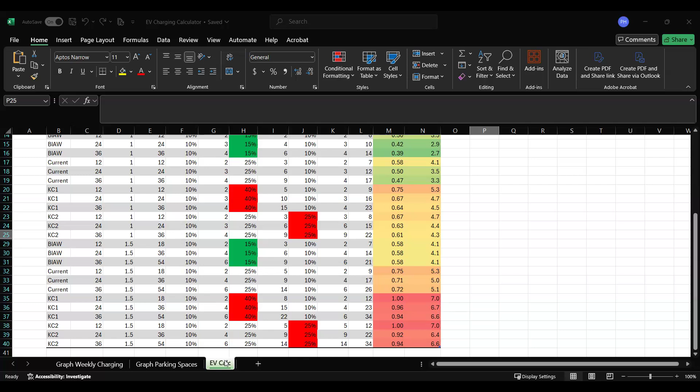So one thing I'll weigh in on here is, again, back to our RCW we were looking at earlier, the 19.27.540, and that's under the building code section. We were looking at rule 3 where it says the rules under this section must exceed the specific minimum requirements established under subsection 2. But then it goes on to say, to the extent necessary to support the anticipated levels of zero emissions vehicle use. And so it goes into a little more detail, but I just think the council has a tough task of looking at forecasts.

And how that's defined can be debated, what data sets we look at and so forth. But to me, I'll state my opinion that it's very clear: it's not looking at current adoption rates, it's looking at anticipated, where we're going. And that's true with a lot of the building code. So I guess my question to the tag here is, can we establish with confidence a number today, or do you feel that should be the council's responsibility, and we're just looking at the technical merits of this, saying yeah, this probably needs to be looked at every 3-year cycle, and some action needs to be taken on adjusting those table numbers? Or do you feel they're locked in stone right now, and only the legislature should really weigh in on this?

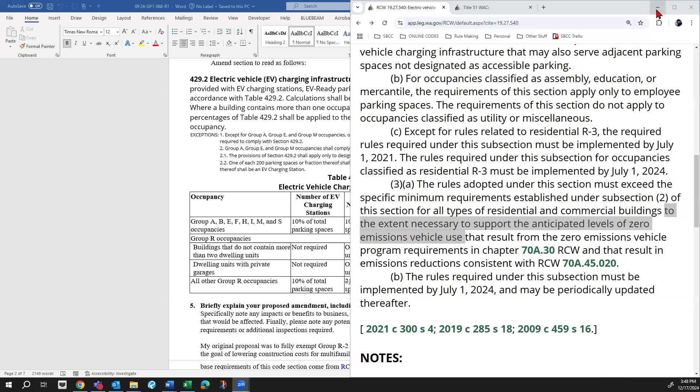With time running short, we've got 3 proposals left here. Proposal 68 essentially is 15%. Proposal 122 is 40%. But if we're gonna focus as a tag on the technical merits, I think we could look at 135 and think that the removal of the exceptions isn't a number issue. And I think the removal of exceptions probably should not be approved. So in my opinion, 135 should be taken off the table. And if anything's going to move forward for a public discussion on number, then 68 and 122 is where to have those discussions. I would like to see us address 135 and just get that out of the way.

Okay, seems like a good starting point. If someone wants to make a motion. I would make a motion to exclude 135 and move the other 2 proposals forward.

Okay, thank you, Lance. I'll second that. That is Hoyt as a second, I believe. Okay, so that's a motion for all 3 proposals then. Wait, I thought it was just 135 we're talking about. Can you clarify, Lance? No, my motion was to exclude 135 and move the other two forward. I second that. So we could even say deny 135 and move the other 2 forward, however you would like to word it.